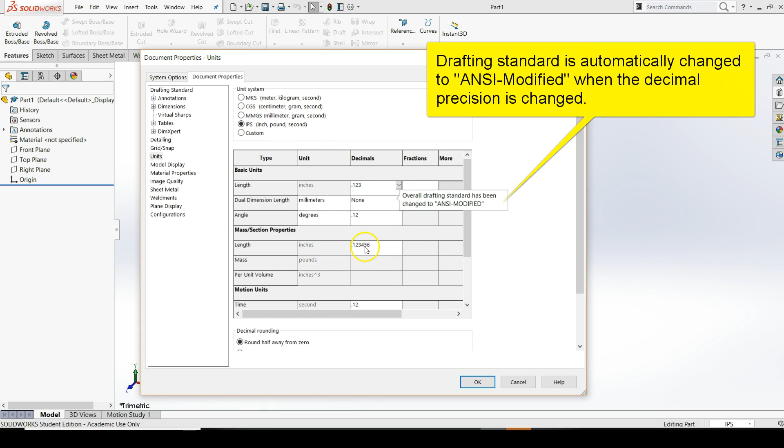For example, my length should be to a decimal precision of 3 because I believe my smallest increments are going to be 3. And the mass properties, that can be way out to 6 decimal places because that's for doing mass and things like that. And I'm going to have ANSI modified. So I'll press OK and then start sketching on the right plane.

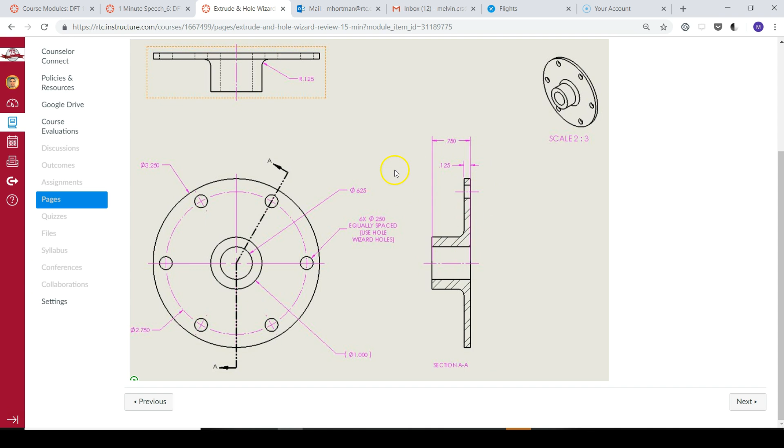Because if we remember from our demonstration previously, how we work with Revolve boss bases is we start with the cross section and we're going to sketch out the top half of the cross section and then revolve it 360 degrees to get the cylindrical part, or at least the majority of the cylindrical part. So I'm going to go back to SolidWorks and sketch on the right plane.

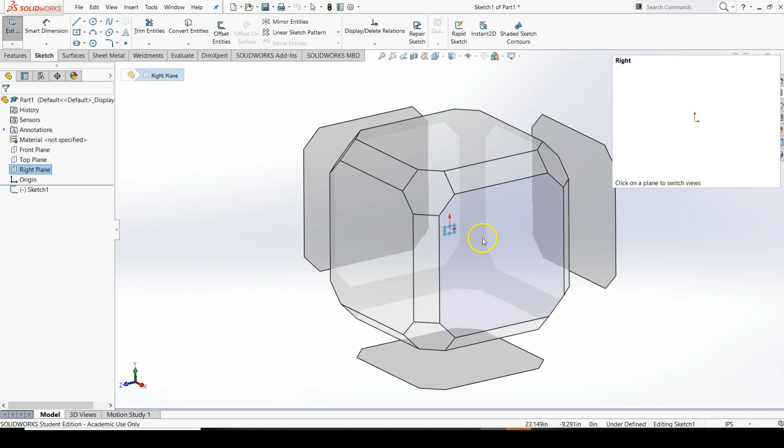Click on the right plane, I get my quick access toolbar and I can hit sketch here. If SolidWorks didn't automatically make you normal to the right plane, you can go up to the view toolbar, click on the view cube, and then click on the face that is going to put you normal to the right plane.

Now the first thing I'm going to do is create a center line, and instead of drawing it from the center point, I'm just going to draw it out here in space because something weird happens when we create an infinite center line. It gets rid of all relations. So I have my center line.

I'm going to click on it to highlight it, go over to the property manager, and then click the box that says infinite length. And then what I'll do is I'll go up to the add relation button, which is in the command manager of the sketch tab. In the drop down where it says display delete relations, I'm going to go to add relation.

My line 1, my center line, is already selected in the selected entities because when I had clicked on add relation, this center line was already selected. So now all I have to do is click on the origin point and then say to make them coincident to each other. Click the check mark, click somewhere out in space to see that my center line is now fully defined.

Now I'm going to sketch the profile, and this is just going to be a rough profile. It doesn't have to be exact because remember, with SolidWorks in our sketches, what we do is we create a rough sketch and then add the dimensions, add the constraints later so that our sketch becomes fully defined.

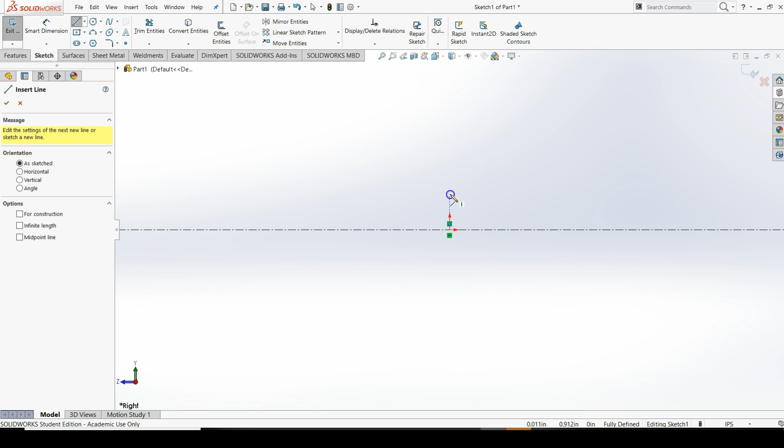So I'll start out with creating a vertical line that's vertical with the origin, but remember, it's not on the origin, it's just above the origin because this part does have a hole in it, so we want to model that into our sketch. So I have a rough sketch of what the top portion of my cross section is going to look like. Now I can start adding smart dimensions with the smart dimension tool.

The first dimension I'll add is this diameter. I know you all remember from AutoCAD that we would originally have to apply radius dimensions, doing the math from a drawing that listed all of these circular measurements as diameters. Well, not in SolidWorks. SolidWorks has this smart feature where if I bring my cursor below the center line, it will automatically assume that I'm going to be placing a diameter.

This is because SolidWorks knows that it is capable of doing the Revolve Boss Base feature, and that when I do the Revolve Boss Base feature, I'm going to be sketching something that's going to end up being cylindrical, so I probably want to apply some diameter dimensions. So above the center line, I can apply a radius if I need be, but more commonly, I'm going to need to apply a diameter.

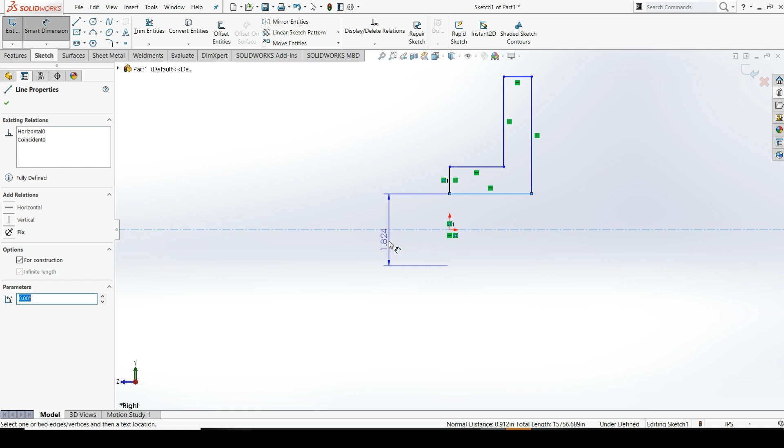So I just pull my cursor down below the center line to click to specify the diameter of 0.625. Then I'll do the same thing for the top line. And notice I clicked the top line and it automatically put me into a diameter dimension. Usually with Revolve Boss Base features, you not only have one diameter, but you have a bunch of diameters that you want to place on your sketch.

So SOLIDWORKS is, in a very smart way, guessing that I want to place another diameter, allowing me to place a diameter without having to click on the center line nor go below the center line. So I will apply this dimension of 1. I'll apply the top dimension of 3.25. I'll zoom out a bit with my mouse wheel so that I can see a bit better.

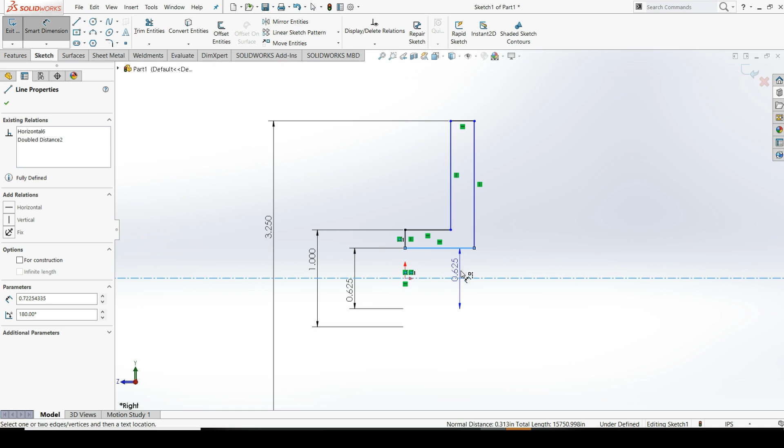I require a 0.75 dimension for this bottom line, but see how it automatically placed me in a diameter dimension? To get out of the diameter dimension to apply a thickness, I press Escape on my keyboard. So now I can place this thickness dimension of 0.75. And same thing goes for this top thickness of 0.125. And now my sketch is fully defined.

If I wanted to, I can put my fillet in right here as well, but there's no harm done putting the fillet in as a fillet feature. I'm going to put the fillet in right now just to make less features for myself. So I'll go to Sketch Fillet, which is on the Sketch tab of the Command Manager. Click my corner that I want to fillet, which is a point in this case. Set the radius to 0.125 because I believe that's what it is.

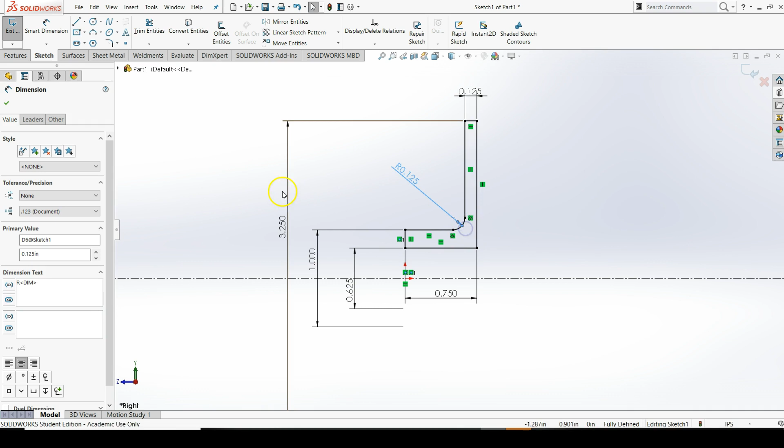Press the green check mark to confirm this size of the fillet, and then press the green check mark to confirm that there are no more fillets to be added. My sketch is fully defined. I'm ready to go. So I'll go up to the Features tab in the Command Manager. Now go to Revolve Boss Base.

Automatically SOLIDWORKS knows that the only center line in my sketch is going to be the axis of revolution. You can see in the Property Manager for the Revolve feature that the axis of revolution is automatically selected as Line 1. Now if I had more than one center line inside my sketch, SOLIDWORKS would ask me which center line I want to be my axis of revolution. Note that you can also click solid lines to be your axis of revolution.

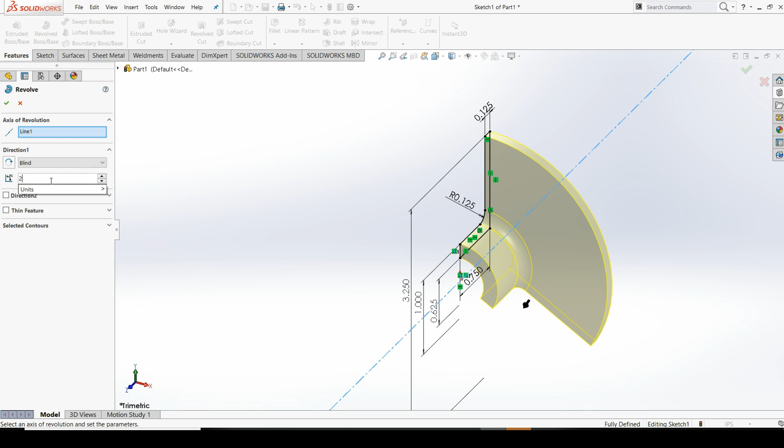I can also change the amount of angle that my sketch is going to be revolved. For this case we want 360, but imagine if I wanted 180. I could easily type that in. Or 120. Or 270. I could easily type that in to make some pretty complex geometry. SOLIDWORKS allows us to do these things very quickly and efficiently with the Revolve Boss Base feature.

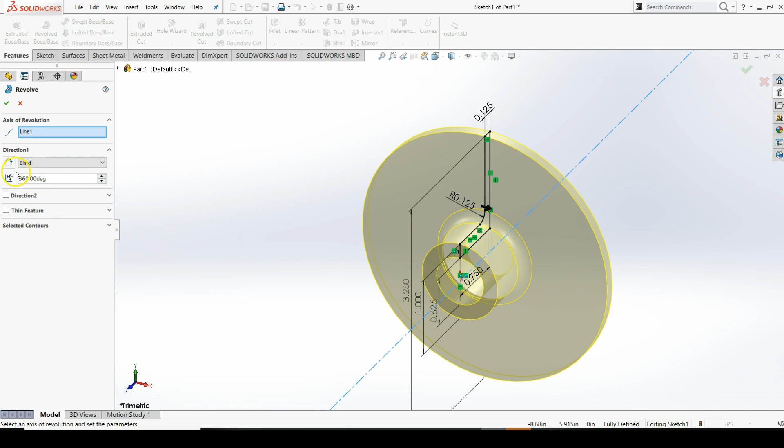I'm going to put my value of 360 degrees back in because that's what I want. So I press the green check mark to confirm, and now all that's left is to do those holes.